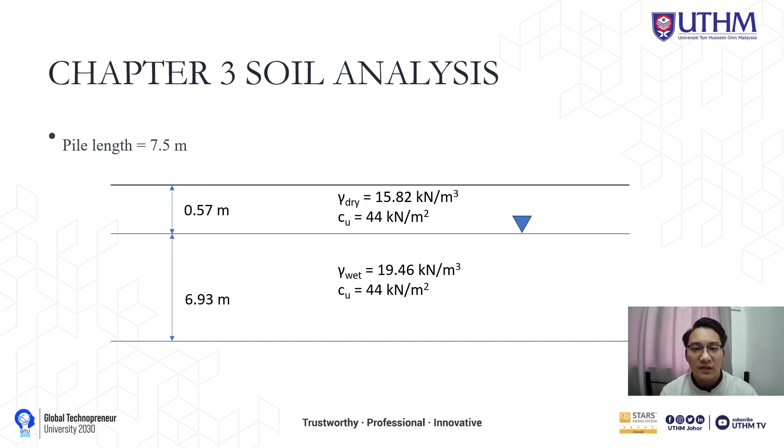Assalamualaikum warahmatullahi wabarakatuh. My name is Nur Sini Binti Marzi. My matric number is EF190128. I'm from Group 1. So for today, I will explain about analysis and design of foundation. Before planning the foundation for the proposed project, the loads and the allowable load for each column in the building must be estimated. The applied load for each column is determined by the detailed plan for the column, which is included in the appendix. The outcome was then taken from the estimate.

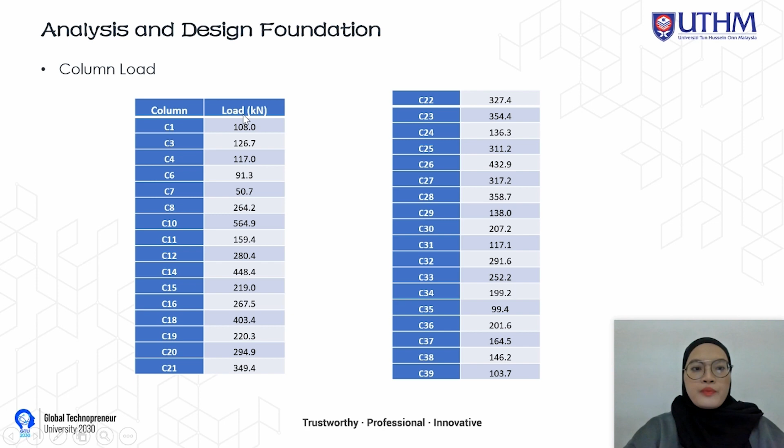This project takes into account 34 column analyses from a one-story building, and then the columns will be separated into groups based on their load. This table shows each load for the column, and for the column grouping, each column will be arranged by group according to their load range, and every group will be designed based on the maximum column loading. For example, group 1 has a maximum column loading of 99.4 kilonewton.

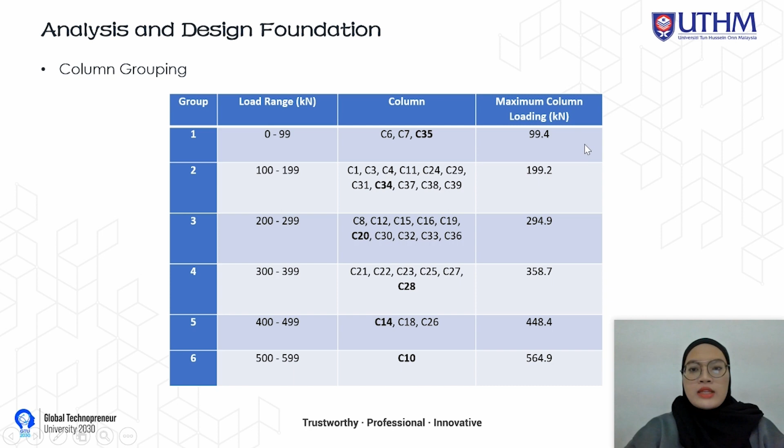Group 2, we have 199.2 kilonewton. Group 3, 294.9 kilonewton. Group 4, 358.7 kilonewton. Group 5, 448.4 kilonewton. And the last group, 564.9 kilonewton. So each group will be designed according to the maximum column loading for each group.

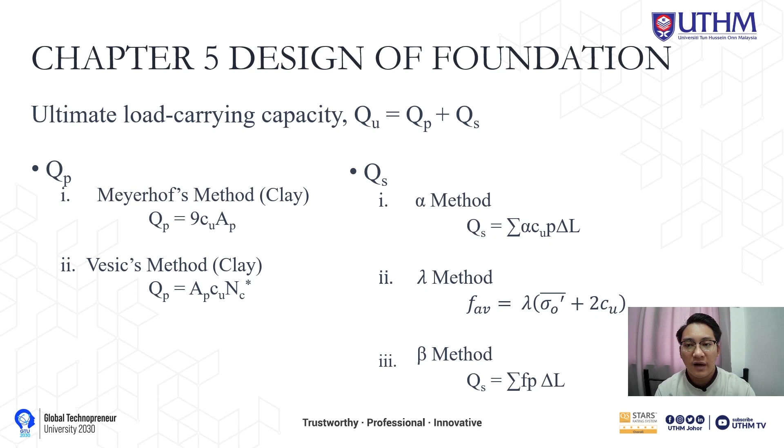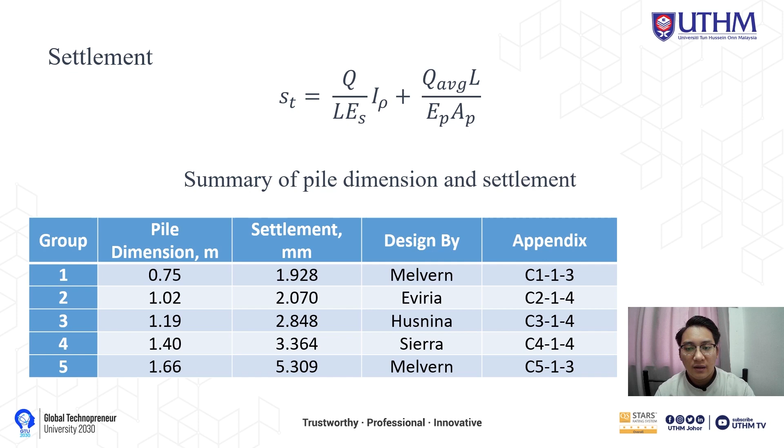Next, I'll present Chapter 5, Design of Foundation. The ultimate load carrying capacity is the summation of the load carrying capacity of the pile point QP plus the frictional resistance QS. QP can be calculated by taking the average of Meyerhof's method and Vesic's method, while QS can be calculated by taking the average of the alpha, lambda, and beta methods. Next, for settlement, we will design using the Poulos and Davis method, and this is the formula. The table shows the summary of pile dimension and settlement, and all settlements are allowable, less than 25 millimeters.

Next, for soil improvement with admixture or inclusion, we have vibroflotation. Vibroflotation is a ground improvement technique used at a considerable depth using a powered electrical or hydraulic probe, which will strengthen the soil. This technique is used to improve the bearing capacity and reduce the possibility of differential settlement for the proposed load. In order to deeply compress the soil and reinforce it so that it can hold the anticipated imposed load, a probe known as the vibrofloat will be used.

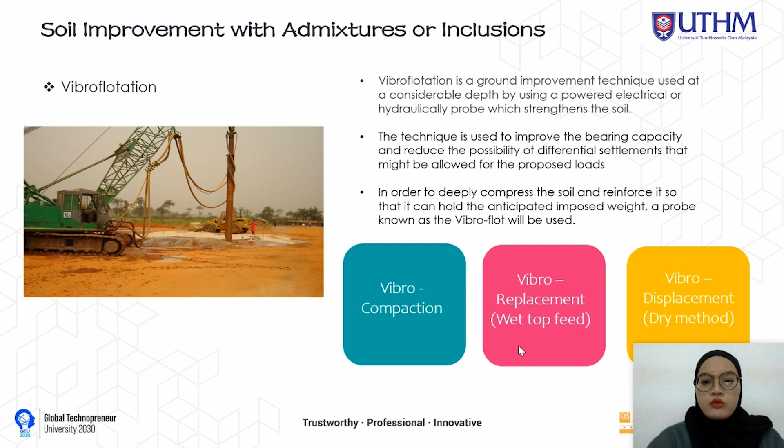The process for vibroflotation is really simple. The depth probe is located over the compaction point. The flushing water or air is expelled through the jet in the tip of the probe. This induced jet vibration will liquefy the soil temporarily, allowing the probe continuous penetration under its own weight. There are three types of vibro methods we can apply: vibro compaction, vibro replacement wet top feed, and vibro displacement dry method.

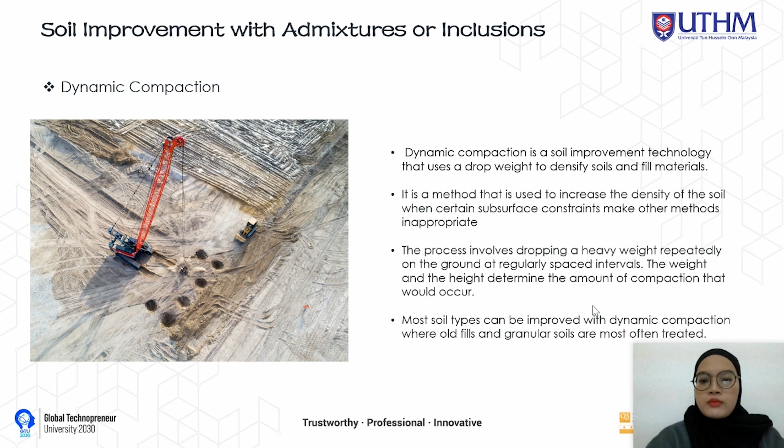Next, we have dynamic compaction. Dynamic compaction is a soil improvement technology that uses a drop weight to densify soil and fill material. It is used to increase the density of the soil when certain subsurface constraints make other methods inappropriate. This process involves dropping a heavy weight repeatedly on the ground at regularly spaced intervals, and the weight and height determine the amount of compaction. Most soil types can be improved using this method, where fill and granular soils are most often treated.

Next, we have soil improvement using stabilization with chemical additives. Soil stabilization involves the use of stabilizing agents in the weak soil to improve geotechnical properties such as compressibility, strength, permeability, and durability. Chemical stabilization uses additives such as cement, lime, fly ash, and blast furnace slag. First, cement may be considered a primary stabilizing agent or hydraulic binder because it can be used alone to bring about the required stabilizing action. Second, lime: lime modification describes an increase in strength brought by cation exchange capacity rather than the cementing effect of the pozzolanic reaction.

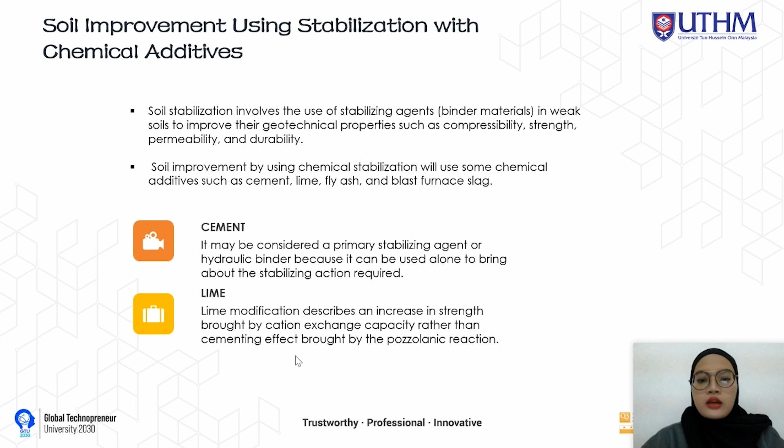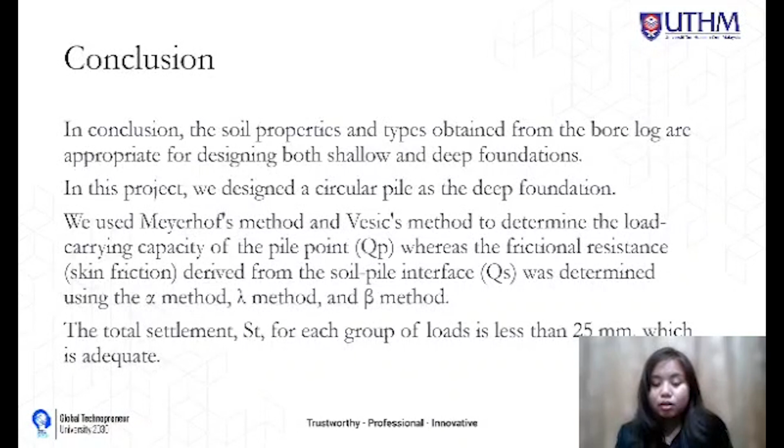Chapter 7, Conclusion. In conclusion, the soil properties and types obtained from the bore log are appropriate for designing both shallow and deep foundations. For our project, we use a circular pile as the deep foundation. We use the Meyerhof and Vesic methods to determine the load carrying capacity of the pile point QP, whereas the frictional resistance, skin friction from the soil-pile interface QS, was determined using the alpha, lambda, and beta methods. The total settlement for each group of loads is less than 25 mm, which is adequate.